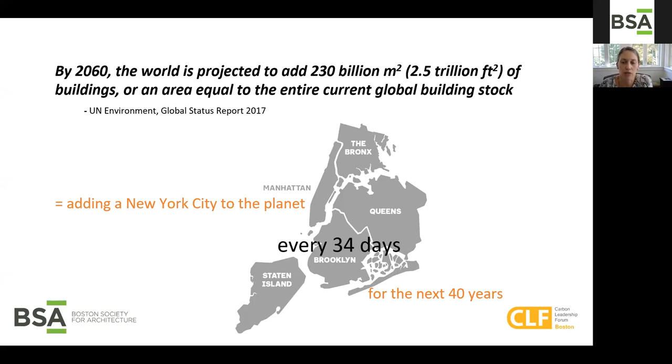Since you've been following this series, I think this is probably something you are quite familiar with already, but so that we can gain some perspective for why these certifications and commitments exist, let's just review some of the scary facts about embodied carbon. It starts with the pace of construction globally, and the fact that based on the UN Environment Global Status Report from 2017, it's predicted that we are essentially adding a new New York City to the planet every 34 days for the next 40 years. So it's an incredible amount of construction that's happening.

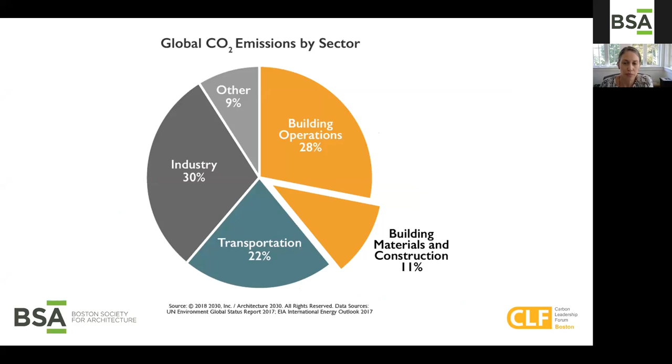And Architecture 2030 has done a really great job of giving us some visuals and resources that also describe this and show that building materials and construction account for 11% overall of the global carbon emissions by sector. The embodied impacts of materials, the growing body of knowledge around this, essentially says we cannot net zero our way out of this problem.

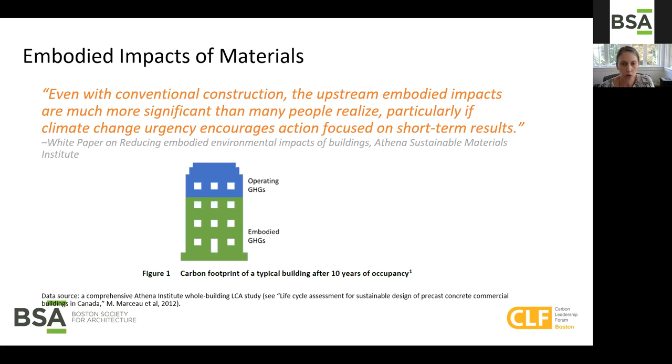And so what we're trying to do is increase the awareness of our clients, building occupants, other decision makers and stakeholders to realize that embodied greenhouse gas impacts are becoming increasingly significant. It actually becomes even more true, of course, as we reduce our operating carbon, which we have a pretty good handle on how to do. So we're now needing to turn our attention to the embodied impacts.

So let's dive into the certifications and commitments that we're reviewing. We'll be talking about Architecture 2030 and SE 2050, LEED, a couple of options provided by the Institute, the Living Building Challenge and the Zero Carbon certification from ILFI, the National Green Building Standard, which is the residential counterpart to the International Green Construction Code, Enterprise Green Communities, Energy Star and its partner program, Zero Energy Ready Homes, and Passive House, as well as the Well Building Standard and Fitwell.

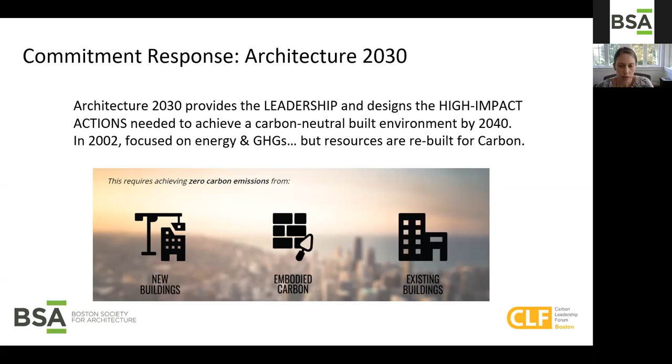Let's start by talking about Architecture 2030, which truly has, as stated in their mission statement, provided leadership around this issue. It started in 2002 with a focus on energy and greenhouse gases, but they've done a wonderful job of retooling to address this growing body of knowledge and the growing concern around embodied carbon. So they've restated the mission to say achieving zero carbon emissions and talking about new buildings as well as embodied carbon and existing buildings.

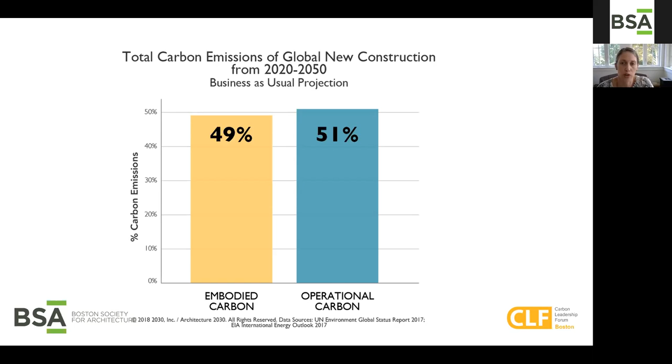So they're putting out information in a digestible format with graphics like the following that shows that between 2020 and 2050, if we continue to practice business as usual, we can expect to see the percentage of carbon emissions coming from embodied carbon at essentially half. So basically equal to operational carbon, which is a sobering fact. And that's why Architecture 2030, among its many initiatives, has launched several that are focused very specifically on embodied carbon.

So to my knowledge, this started with the 2030 Challenge for Products that came out around 2011. Of course, the organization is also co-running what used to be called the Embodied Carbon Network, now the Carbon Leadership Forum Community. And then there's a couple of tools that I'm going to touch on briefly here, including the Carbon Smart Materials Palette and the EPD Quicksheet.

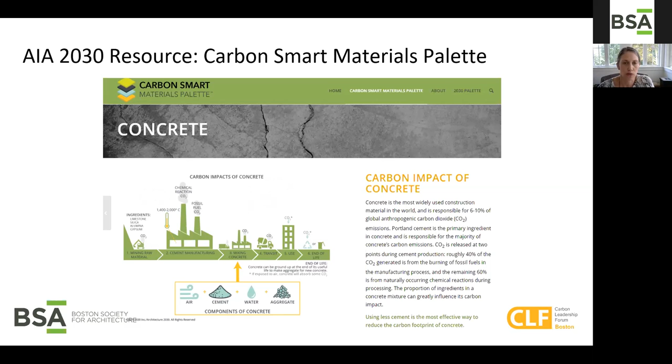Another one of the resources is the EPD Quicksheet. So that, of course, is Environmental Product Declaration. And this is a way to streamline the information found in these declarations. EPDs, of course, are essentially the miles per gallon stickers, if you will, for a given product to describe what its various climate impacts might be, expressed in things like global warming, ozone depletion, acidification, eutrophication, smog creation, etc.

So one of the things that becomes challenging on a project is that the information can be presented different ways by different manufacturers, and this is essentially a way to streamline, pull out the relevant pieces and have them in a similar format so that you can more easily compare apples to apples for a given selection that you're making between product choices.

So just to sum up, we've got a variety of tools, resources, as well as the overall commitment from Architecture 2030. And it really sets the stage, I think, and offers that leadership for where the rest of the green and energy efficiency industry can go.

Maybe a similar initiative is actually coming from the structural engineering sector with SE 2050, which is committing to net zero, and they are describing themselves as a community of progressive structural engineers who are endorsing a global vision of net zero carbon building. This, by the way, started around 2016. One of the things they're offering is the ECOM, the Embodied Carbon Order of Magnitude, a very simple calculator for structural materials, and I've got a screenshot of that coming up.

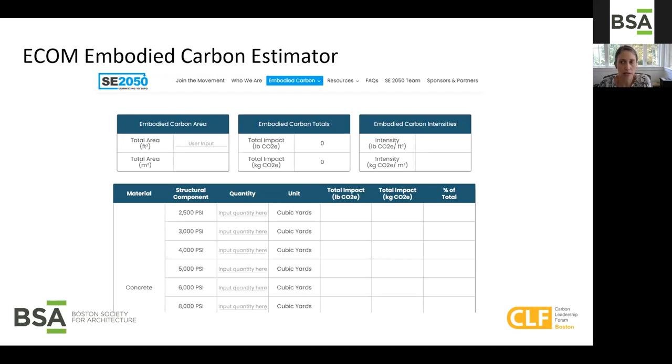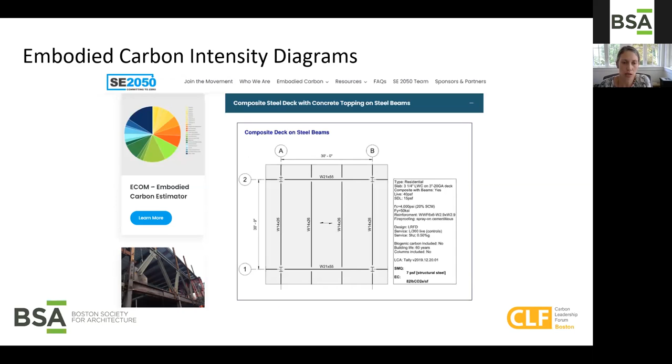There also are a couple of embodied carbon intensity diagrams available, but I think some of these are still forthcoming. There was a steel decking one, but some of the other options I wasn't able to find at the current moment.

So as I'm going through, I'm using my own super informal starring system, which is just to offer some indication of, in these resources, sort of how much is available. So at this moment in time, I think there's slightly more developed from Architecture 2030. So I've given them 3 stars, and we'll work our way down the list and see how each of these sort of stack up.

So the next one that I want to talk about is LEED. Now, LEED in its basic iteration, starting back with the original version in 1998 up until essentially 2013, addressed embodied carbon kind of indirectly, giving projects credit for building reuse, reclaimed, reuse, or recycled content, as well as local materials, construction waste management, etc.

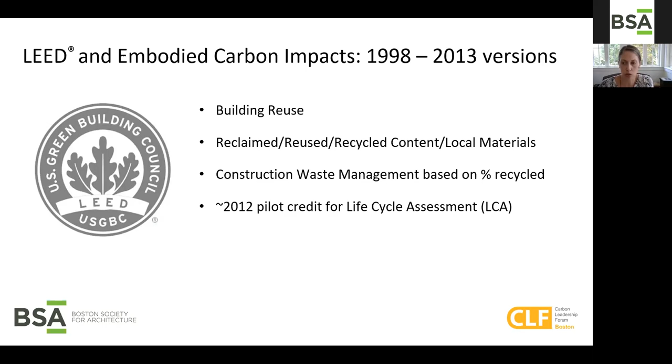But they didn't address it more explicitly until a pilot credit that I believe was introduced in 2012, when they first started to recognize life cycle assessment, or LCA tools. And then in 2013 came LEED version 4, where we suddenly saw a restructuring of the entire materials category, and it included credits around building life cycle impact reduction, which they divided into building and material reuse sections, more similar to the old version of LEED, as well as this new idea based on the pilot credit around whole building life cycle analysis.

And they were asking projects to show a 10% reduction compared to a baseline building in at least 3 out of 6 different impact categories, and one of those must include global warming potential. So this required, of course, the use of an LCA calculator. And I reached out to the folks in my firm who had done this type of work to get a sense of how many of their projects are participating in this, as well as what

the costs might be. And in very rough terms, they indicated that the cost for a full LCA, including that early analysis, might be on the order of $10,000 per project. Certainly could be much less or potentially much more. And some of the tools that project teams are commonly using include Tally, or One-Click LCA. The one that we happen to use at Steven Winter Associates is One-Click LCA.

And while it seems to be an achievable credit for the projects that are interested, we have yet to see a very large number of projects opting in for the full LCA credit. So it's definitely an option, and one we're doing our best to encourage, but it's not yet necessarily in the mainstream of all projects pursuing LEED.

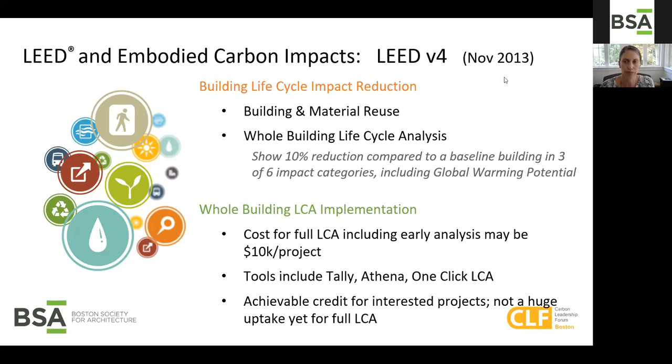So along came version 4.1 of LEED. In general, the market had pushback to LEED version 4, and there were some lessons learned and some improvements that were made. Many of them in the materials and resources category, probably more heavily focused on some of the health-related impacts, but also on some of these building life cycle impact reductions. So in April of 2019, we saw some edits to LEED in the form of V4.1, and even V4 projects can opt in to using 4.1 credits through credit substitutions.

So what they did was they basically broke this out into more options. Instead of only having the option to do a whole building LCA, they offered some tiers. So you could earn credit for doing 5% as well as 10%. And they added an option for what I'll call a simple LCA or a hotspot level sort of pre-design analysis of the structural and enclosure elements only.

So in terms of our experience with this pathway, we're finding that it is an impactful option, especially when building size and structure type are being chosen, and you can have some influence early in the project design. It also gives you the ability to then set a benchmark, have the conversation, and really set some goals for embodied carbon intensity reduction.

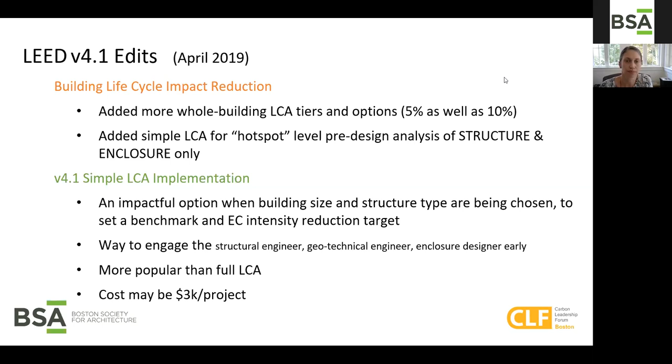So that was one piece of the LEED credit. Now I'm going to talk about a different credit that shows up in both V4 and 4.1. And this has to do with those EPDs, the Environmental Product Declarations. This is under the Building Product Disclosure and Optimization section.

And the credit as written in LEED V4, again, this was the first time that this showed up in the LEED rating systems, was recognizing any products that had EPDs. And what they were requiring specifically was to have at least 20 products from 5 different manufacturers that are either ISO compliant, there's a variety of ISO standards, or had cradle to gate EPDs. So they all needed to be third party. There's a number of different standards and criteria that are sort of wrapped into what makes a compliant EPD.

This is achievable. It definitely takes some research effort, and so maybe it's not as attractive to some project teams, but generally speaking, this is something that many projects can pursue. But the EPDs is really just a matter of checking whether they exist. To encourage project teams to go even a level deeper, LEED included what they called the multi-attribute optimization, which was to really weight those EPDs. So it's not just saying what's in it, it's also basically giving priority and more credit, as it were, to

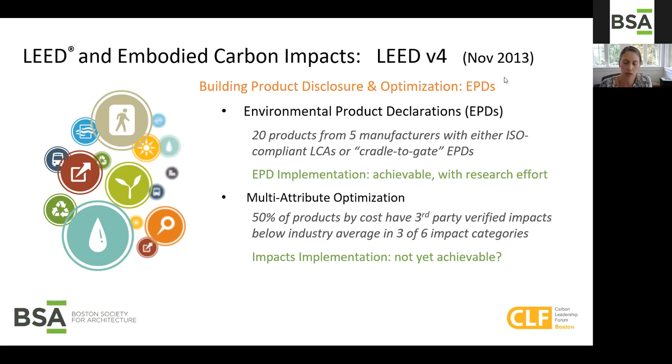the most impactful selections. So while this was a wonderful idea, we found that generally speaking, it was quite difficult for projects to achieve in most of the projects that we were working on. So along came the 4.1 update again. So this was 5.5 years after LEED V4 was first introduced. So obviously the industry had made some headway and learned some things.

And to the EPDs portion, there were some changes to how products are counted, giving whole point instead of quarter per product, etc. And then they also added several more ISO compliant standard options, which all serve to make this option more achievable. And in fact, many projects now are earning exemplary performance for having not just 20, but 40 or more compliant products.

As far as the multi-attribute optimization, the one that in our experience had relatively little uptake, this was now separated into an action plan for manufacturers and then actual impact reductions that were achieved. So this was one way to maybe recognize both the intent of manufacturers working their way toward an improved impact scenario versus those that had already gotten there to their reduction targets.

So there's an option for 10 or more compliant products from 3 or more manufacturers. Instead of also having to do it by 50% cost, you have a choice. And the transparency part in particular, we're finding is definitely much more achievable now with the action plan.

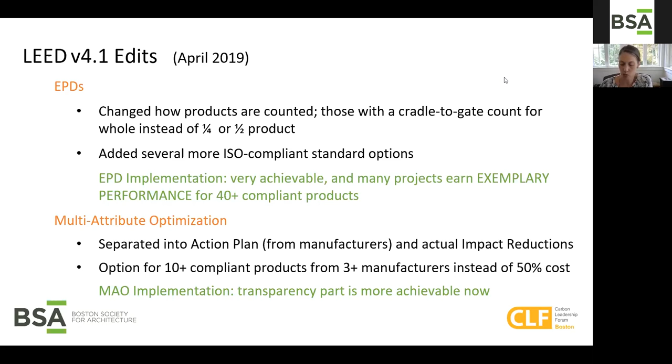So another LEED credit is the product disclosure and optimization, the sourcing of raw materials. And here we're looking for raw material sourcing and extraction reporting, where there's 20 or more products from 5 or more manufacturers who are publicly disclosing their extraction locations and committing to responsible practices along the way. This is one that, generally speaking, most of our projects are having a little bit of a tough time with.

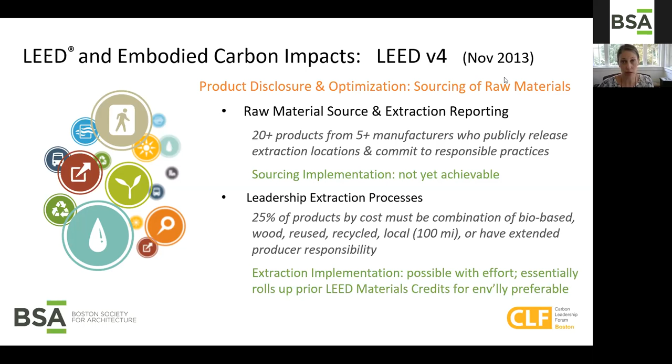And then there's the leadership extraction processes, which requires that 25% of the products by cost are a combination of, for example, bio-based or naturally renewable, like wood, reused, recycled, or local within 100 miles. So this is essentially lumping together a lot of the previous versions of LEED, a lot of their different credits. And this seems to be possible with some effort, especially because it rolls up those previous LEED materials credits that the industry was somewhat accustomed to.

So in 4.1, there was actually a couple of big changes here. They got rid of that raw material source and extraction reporting, and they renamed the second option the responsible sourcing of raw materials. So they introduced 2 different tiers for either 20% or 40% of the total materials by cost. And then they changed the bio-based credit criteria for non-wood products slightly. And reused products were clarified to be worth 200% instead of 100%.

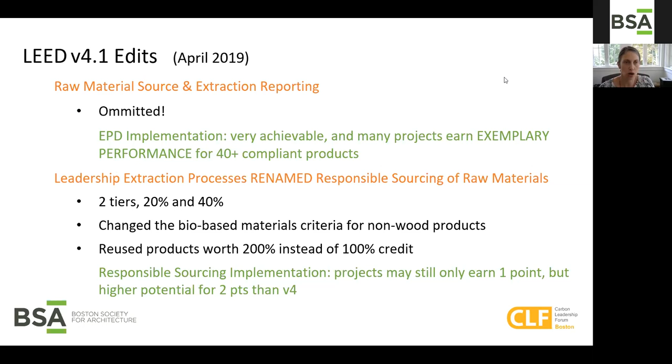So projects may only still earn the 1 point. That's probably the most common scenario. But with the V4.1 edits to this particular credit and these pathways, we're seeing higher potential to earn 2 points than we did under version 4. So this made this category also a bit more achievable.

So speaking to LEED for homes, in general, LEED for homes continued to follow a more prescriptive approach, although they will allow substitution of any of the LEED credits that I just described from the BD&C rating system. But one of the things that was sort of unique in LEED V4 was their approach to construction waste management, which was the first time I'd seen in LEED where we'd introduced a per square foot limit on construction waste management. And even maybe more significantly, recycled materials still counted against you. They counted at 75% instead of 100% of materials sent to landfill. But it was still a pretty powerful incentive and signal to the market to flat out eliminate waste rather than focus on recycling.

However, the market was perhaps not quite ready for that. And so along with 4.1, and there was also an earlier credit interpretation update, they essentially reverted to the approach that gives credit for a percentage of waste recycled. So you still have the option to do the sort of more aggressive credit, but it's no longer required.

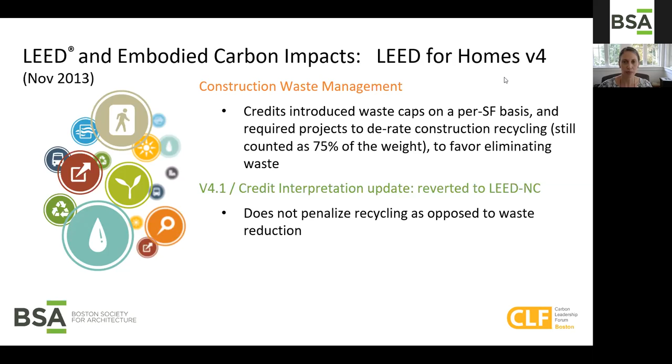So that is LEED in a nutshell, and I will move on to talk a little bit about the International Living Future Institute and some of the things that they're offering specifically focused on embodied carbon. If you're familiar with the Living Building Challenge, you know that it sets a wonderful standard for sustainability. And within that, they also offer Petal certification for projects that perhaps can't do every category in Living Building Challenge, but wanted to do a deeper dive. And the materials Petal in particular allows projects to focus on things like embodied carbon. And then lastly, and probably most relevant to this discussion, is the zero carbon certification option.

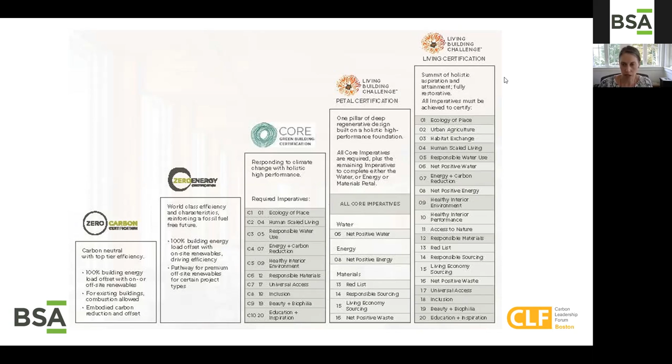A couple other things that are offered by ILFI include the Declare products labels and also the Red List, which are the health focused materials initiatives, and living product certification as well, which is suitable for manufacturers to pursue. So this is a visual that kind of breaks down some of the different options that ILFI offers in terms of its certifications. And the one that we'll be talking about the most today is the Zero Carbon certification, but we'll also touch on the Living Building Challenge too.

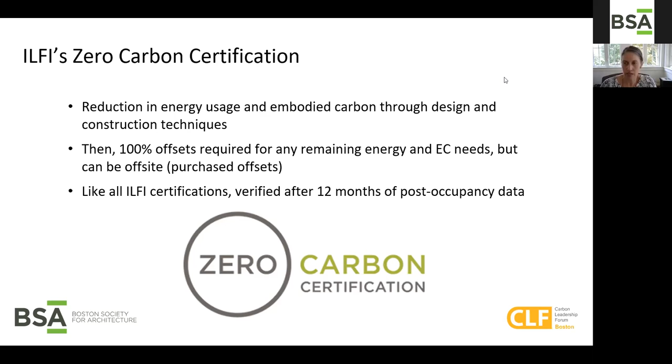So the Zero Carbon certification essentially requires a few main things. It requires reductions in energy use and embodied carbon through design and construction techniques. Then, for whatever you aren't able to achieve, it basically requires net zero through the use of offsets, and those can be offsite. And like all of ILFI certifications, they're looking to verify after you have at least 12 months of post-occupancy data. So it really is a measured achievement.

Here's a little more detail about those requirements. The energy reductions would be 25% for new or 30% for existing buildings from an ASHRAE 90.1 baseline, or there's also an EUI budget based on location. No projects can have combustion, except there's an exception for existing buildings. And then, as well as the operational energy reduction, there's an embodied carbon reduction where we're looking for a 10% reduction compared to a baseline using some approved LCA tools. Those include Athena, Tally, One-Click LCA, and there's also a cap in place as well.

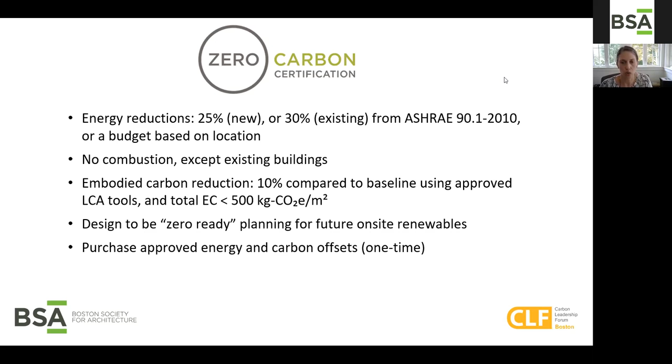Projects are required to be zero ready for on-site planning for future renewables. And then, of course, there's a one-time purchase for energy and carbon offsets through some approved vendors. And so they give some criteria for the various credentials and quality measures that any provider of those offsets would need to meet.

For the Living Building Challenge and the Petal certifications, I'm going to focus primarily on the materials imperatives that would be relevant to the carbon conversation. So under materials, in addition to no Red List, so that's a health one, there's the responsible sourcing, use of third-party labels, including FSC, Forest Stewardship Council, NSC, which is the Natural Stone Council, or Declare. And then the living economy sourcing, which has to do with requiring different percentages of the project materials to come from these various radiuses, so to prioritize the use of local materials. And then one of the big ones is in order to earn a materials Petal, you would also have to have net positive waste.

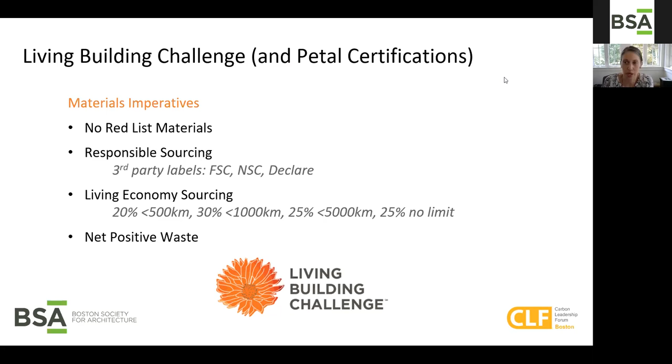So if I were doing my informal ranking and comparing these to one another in terms of the contributions they're making to this embodied carbon mission right now, I'm giving LEED 2 stars. It's got a lot in there, but I'm giving the Zero Carbon certification from ILFI 3 stars because it goes further.

And those are the ones that we have kind of the deepest dive into, really. So I'm going to spend some time now talking about some of the other alternatives. And several of these are more residential focused. So depending on how much time you spend working in the residential sector, you may or may not be familiar, but there are also some relevant tools in there, even if maybe residential isn't all of the work that you do.

So let me speak first to the International Green Construction Code. Where we see embodied carbon showing up is in Section 9, which is the building's impact on atmosphere and materials and resources. It's the things that we sort of have expected to see in our green building programs over the years, including attention to construction waste, the extracting, harvesting, and manufacturing of materials, responsible refrigerants, and the storage and collection of recyclables and discarded goods to make the building more waste management friendly during its operation.

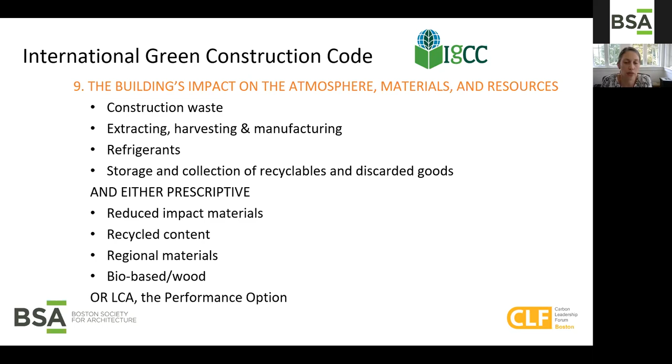The National Green Building Standard has a relationship to IGCC in that it is the proxy for residential buildings. The standard, though, the NGBS, as we call it, also allows for optional green building certification of any residentially qualifying building, regardless of whether the code applies or not in a given jurisdiction. So NGBS is, I would say, a direct competitor to LEED for Homes and LEED for Multifamily. And I think it has many similarities in what it historically recognizes in terms of waste management and

the green materials. Where we started to see changes was really in the 2015 and 2020 versions of the standard, where for the first time we saw whole building life cycle analysis or a life cycle analysis option per product or assembly. And this is one that I have seen pretty limited uptake. I have seen a little bit on the per product basis, but so far my NGBS projects have not opted for the whole building LCA option, but it is available for them to pursue.

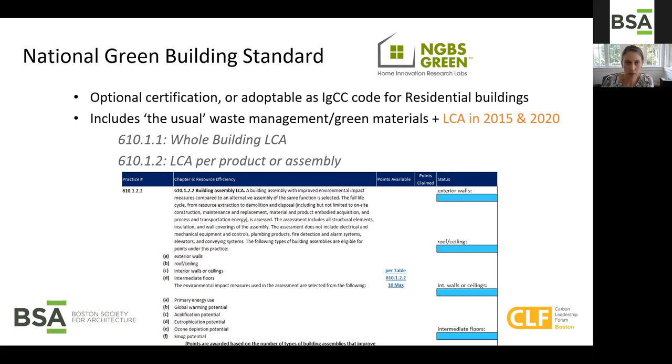Another program I wanted to mention is Enterprise Green Communities, and you might not be familiar with this unless you do work in affordable housing. If you do work in affordable housing, I would say you almost certainly have some familiarity with this program because it's very often mandatory in many parts of the country. So this has been around since 2005, 2008. And there have been multiple iterations over the years.

It initially bore a really striking resemblance to LEED for Homes, and still does in many ways. And it always had, again, what I'll call the usual suspects as far as waste management, prioritizing local materials, giving credit for recycled content materials, and so on. What's most interesting to me is the 2020 version, which was just introduced this spring and actually goes into effect this coming fall in October.

And I was very pleased to see that they renamed the energy efficiency category operating energy, which I think makes a helpful distinction to start to retrain our minds and retrain our vocabulary around separating the difference between operating energy or operational carbon and embodied energy and embodied carbon. So that I think was an important distinction to make.

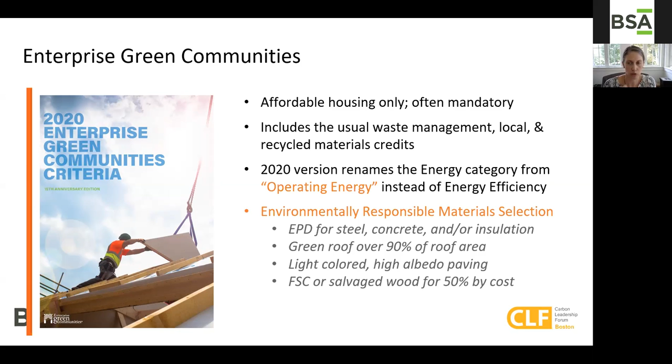Then come these two options related to the heat island, green roof and light colored or high albedo paving. And then lastly, a requirement or an optional credit that the wood in a project shall be either Forest Stewardship Council certified for demonstrating that it's been responsibly grown and harvested, or salvaged wood, and that's a requirement for 50% of the wood in the project by cost. So again, these are options within Green Communities and not mandates, but it was, I think, a positive change for the 2020 version in terms of addressing embodied carbon.

So now let me dive into the energy specific programs. Energy Star, and I'll talk first about Energy Star homes or Energy Star multifamily new construction. This is suitable for either new construction buildings or gut rehabs. And then I'll also talk about the Zero Energy Ready Homes complement to that. So we've seen a progression over the years where Energy Star initially was very strictly focused on energy. And then they started to feather in requirements around durability and essentially even health as they started to incorporate ventilation requirements and requirements for low emitting materials.

And that, of course, was part of their overall mission to do no harm, to make sure that we were not just tightening up and locking down these buildings in the name of energy while potentially introducing building science failures or negative health impacts to occupants. So that was a great and positive and very responsible step. But unfortunately, there is still no mention and no place in the program for embodied carbon specifically.

Energy Star for commercial buildings is based not on the, let me step back a moment. Energy Star homes and the multifamily new construction options are suitable for incorporation during design phase, and then there's a performance testing phase and visual inspection and commissioning effort that happens prior to occupancy. Energy Star for commercial and institutional buildings, on the other hand, is based purely on benchmarked utility consumption and comparing yourself to ensure that you're at least 15% more efficient than similar buildings. But in the same vein, it's focused on energy and it lacks any specific attention to the embodied carbon impacts.

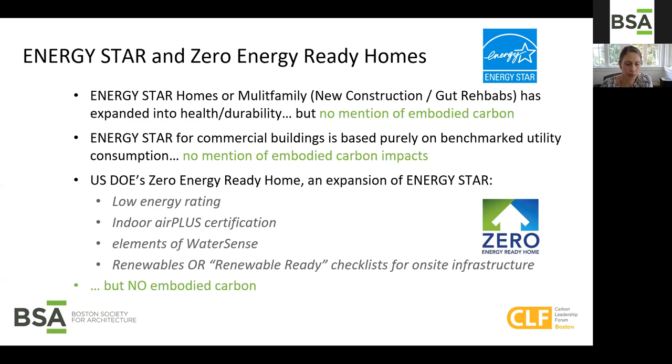So the next one is Passive House. There's more than one variety of Passive House. There's Passive House International, there's Passive House Institute US. They run sort of competing programs. They have slightly different metrics, but both of them are essentially offering a whole building energy budget, and they require tightness and comfort criteria, among other things. I'm sure you all know that this is growing in popularity as a path to near zero operating carbon, and has gotten a lot of attention, and really, in a lot of ways, I think, popularized the idea of being really low energy, which was wonderful. There is no mention of embodied carbon impacts, and there are no specific materials requirements in there.

So that is maybe one of the, I don't know, criticisms, I guess you could say, of Passive House, or that's just not the intent of the program. Another maybe criticism that sometimes comes up is that while the ventilation testing is strictly enforced, which is great because that's a big problem for occupant health if ventilation systems don't work appropriately, the ventilation targets are generally lower than some of what the most recent health research trends support.

There is actually going to be more on how to do Passive House while paying attention to embodied carbon impacts in the next session that's coming up in this series. So I think that's going to be a great one.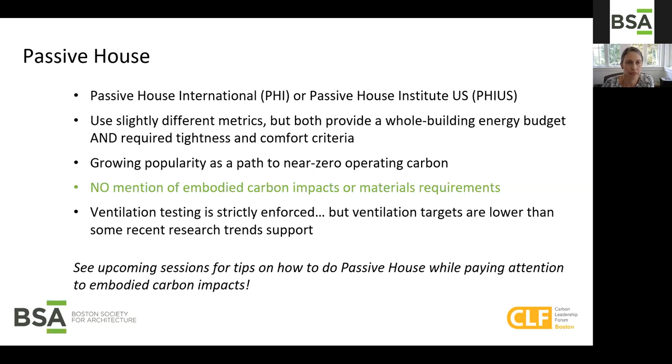So let me just take a moment to talk about a couple of the healthy building certification options. The first one being WELL. This is something that was introduced by the International WELL Building Institute; it was originally introduced by Delos and then taken over by that nonprofit. And it covers a lot of things, but explicitly related to the health experience of occupants in a building without any particular emphasis on energy efficiency or carbon.

But what's interesting about it is that as it does address things like air, water, nourishment, light, fitness, comfort, and mind, it's making some, I guess, more abstract connections than maybe were made in green building programs in the past. And I mention it because I think it's relevant to start some of those conversations. So there's no explicit mention of embodied carbon impacts, but I'm going to talk about another competing program to give you an idea of where I see potential for some of those connections to be made.

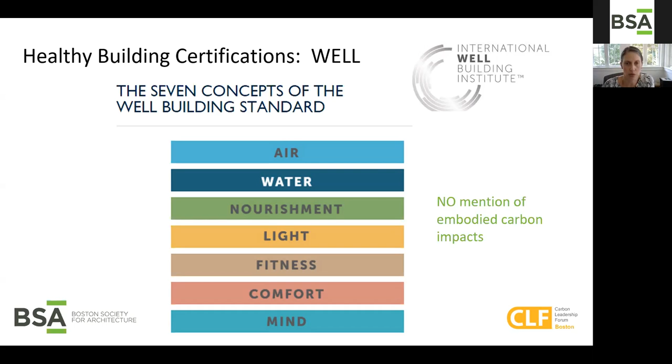Fitwel you may not be as familiar with, it's not been around for quite as long, but this was something that was developed by the Centers for Disease Control and the General Services Administration initially to address healthy workplaces for government buildings. It was intended to be a bit more doable with a lower bar to entry than WELL, and it was intended to be used as a way to benchmark progress, even if you weren't able to or interested in certifying. And it's available for different buildings, tenant spaces, and now also multifamily buildings.

So this is where I see the opportunity to sort of relate the conversation about embodied carbon impacts to some of the goals. It's not there yet. There's nothing in there that explicitly talks about embodied carbon impacts. But they do have impact categories around things like community health, social equity for vulnerable populations, and even instilling feelings of well-being. And I think that this could potentially give us a framework to expand some of how we're thinking about this, because of course the whole conversation about embodied carbon is not strictly tangible. It's something that we need to kind of expand our minds and think about very much the greater good in order to make effective decisions and to set ourselves new goals and actions.

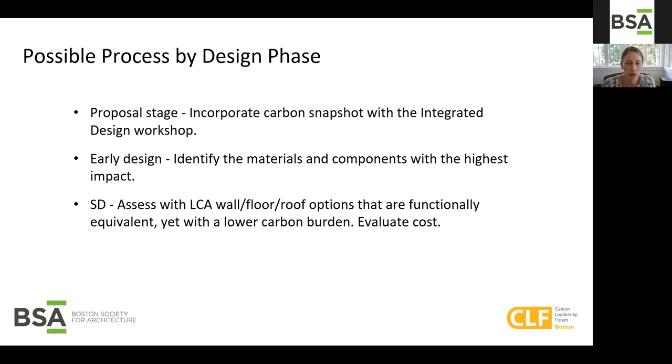So at the proposal stage, this is when you might start incorporating carbon snapshots with the integrated design workshop and talking about it with the client. In early design is when you'd be identifying the materials and components with the highest impact potential. Schematic design, you could assess with the lifecycle analysis tool some of the major structural combination options and look for ones that have a lower carbon burden, and of course then you'd be evaluating the cost.

In design development, that's where you might work with the BIM manager to select the specific materials and quantities and identify the bill of materials. Energy analysis would be important to account for how the structural elements might affect energy performance. So you'd be doing, of course, a balancing act between the carbon goals from operating and embodied, and then doing your assessment with a full LCA.

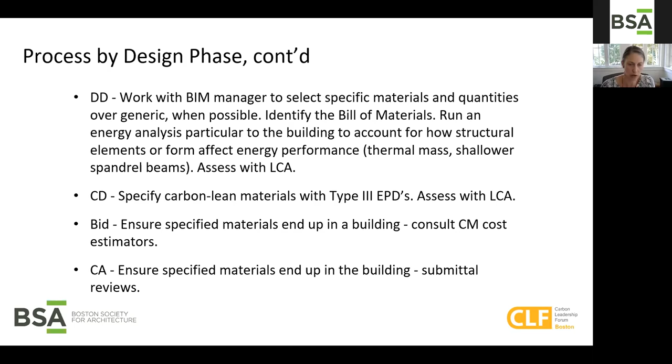In construction documents phase is when, of course, you would have specified carbon lean materials with EPDs and doing LCA again. And then in bid phase is when you'd be ensuring that the specified materials are actually going to wind up in the building during bid and construction administration phases.

So how do we break this down into a simple approach, right? Maybe we don't have the project complexity. Honestly, for my residential projects, I am looking more commonly at a simple approach. So there are only two rules. Rule number one is start early. And by start, I mean we need to educate clients.

I think a lot of the tools from Architecture 2030 are really valuable, whether it's the palette of materials or even just some of their graphics to drive home the point about why embodied carbon is important, because it isn't necessarily obvious and it is competing for their attention with a whole lot of other factors, most notably cost, first cost, and operating cost.

So the conversation needs to happen early about ways that you can use lower carbon or better carbon sequestering materials, and maybe even to just talk about how you can use less material overall, because obviously the reduction is also a powerful tool, not just substitution. These were some of the graphics that I showed earlier in this presentation, but I think illustrations are kind of critical to getting the point across to our clients.

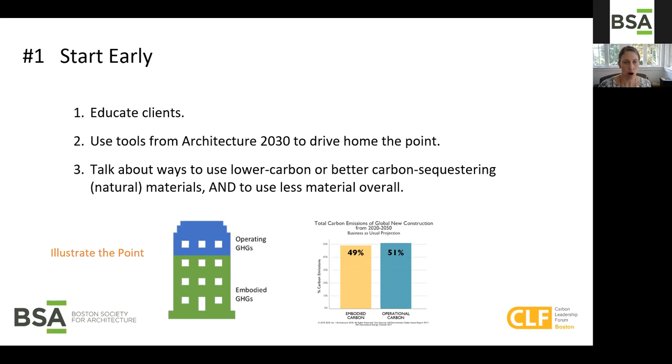And then rule number two is, if simplifying means that you can get a project team to make a commitment, then I am all for simplifying. So maybe that means you're doing the simple LCA, or you're just focusing on the key offending materials with the highest impacts, or maybe you have to focus on some offending materials that have the most suitable alternatives, because perhaps for some of those you may not have suitable alternatives that are available, that you can afford, that meet the team's criteria as far as being tried and true.

In industrialized areas like ours, the three main materials that we're talking about are concrete, steel, and wood, but insulation also has significant impacts. So if you were only going to focus on a few, those are probably the ones you would want to look at first. But I also encourage projects not to forget about waste and seeking creative ways to eliminate it and not rely on just recycling, because of course that's still very energy intensive.

If you wanted to have a really simple approach, I think what Enterprise Green Communities offered is about as simple as it gets, which was have an EPD for your concrete, your steel, and your insulation, and require that half of your wood is either FSC certified or salvaged.